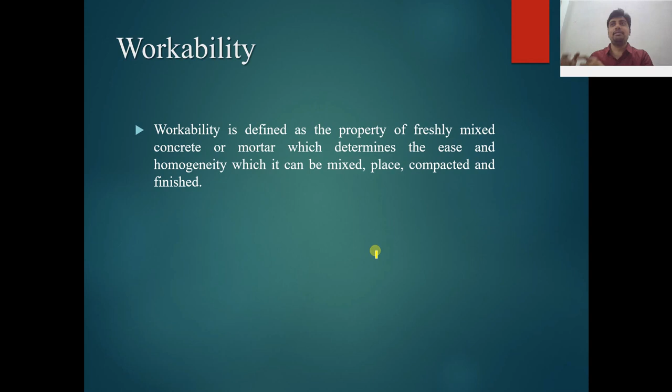What is workability? Workability is defined as the property of the freshly mixed concrete or mortar which determines the ease and the homogeneity with which it can be mixed, placed, compacted and finished.

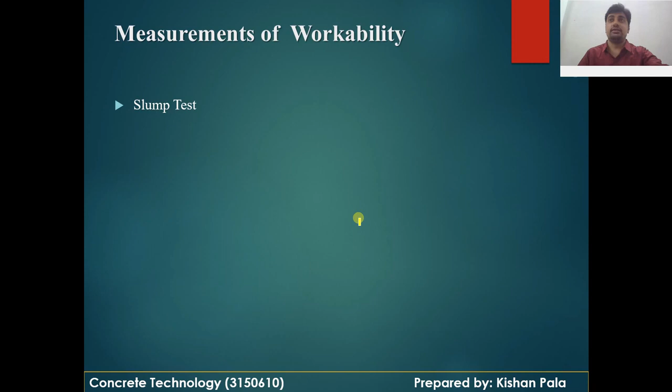Which are the methods for finding the workability of the concrete? There are many tests available. First is the slump test. Second is the compacting factor test. Third is the flow test. Fourth, VB consistometer test. And fifth is the Kelly ball test.

You can use these methods for finding the fresh property, the workability, of the concrete mass. In this lecture, we will discuss the slump test of concrete for finding the workability.

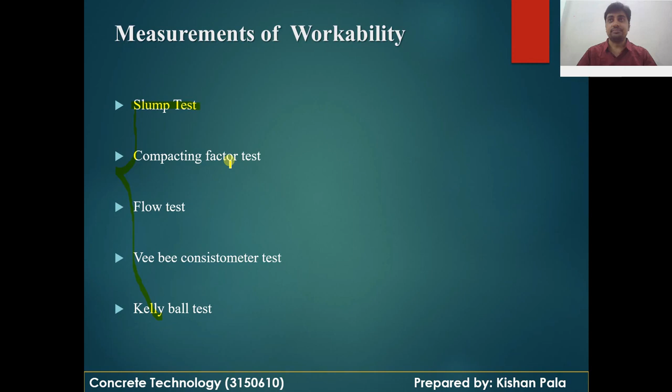Our objective is to determine the workability or consistency of a concrete mix of given proportion by the slump test.

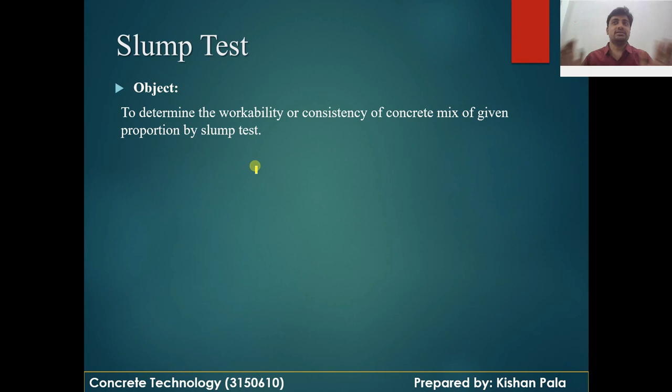Apparatus: as you can see in the photo, we are using the slump cone for finding the workability of the concrete mass, whose top diameter is 10 centimeter, bottom diameter is 20 centimeter, height is 30 centimeter, and the thickness of this mold should be at least 1.6 centimeter.

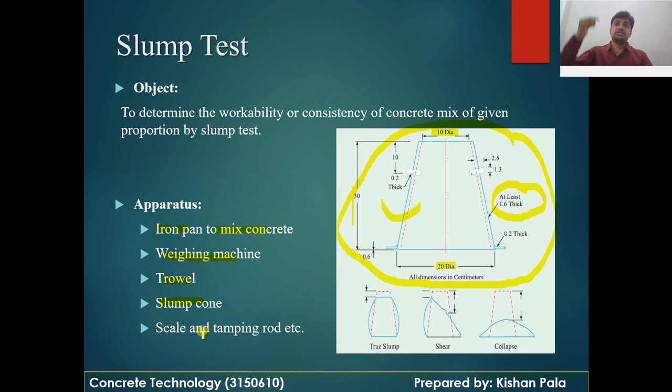Other apparatus used for finding the workability of the concrete include an iron pan to mix concrete, weighing machine, trowel, slump cone as shown in our figure, a scale for measuring the slump value, and a tamping rod for tamping, whose dimension is 16 mm diameter and 60 centimeter height.

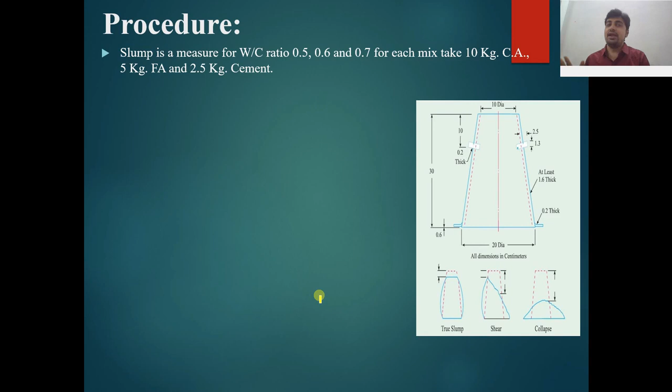Let us understand the detailed procedure of the slump test. Before starting, note one important point: slump is a measure for water cement ratio of 0.5, 0.6, 0.7. For each mix, take 10 kg coarse aggregate, 5 kg fine aggregate and 2.5 kg cement.

Let us start our procedure. Mix the dry constituents of the concrete thoroughly to get a uniform color, and then you have to add the water mass into that mix.

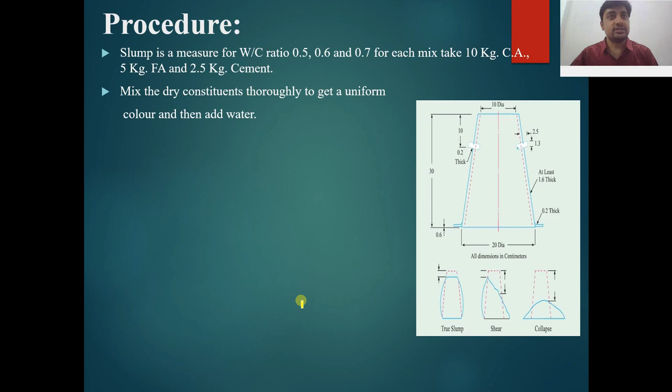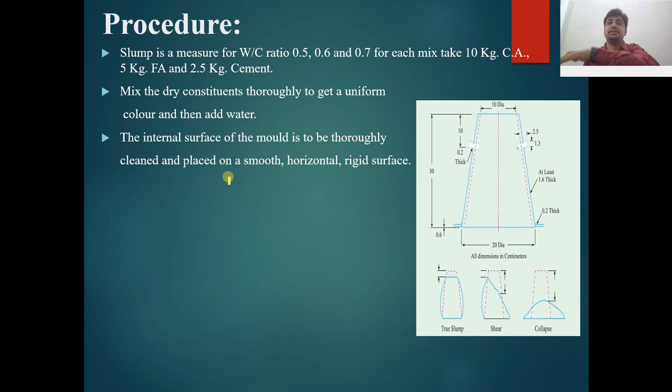Next, the internal surface of the mold is thoroughly cleaned in the proper way, and placed on a smooth, horizontal, rigid surface. You can use a plate also.

Place the mixed concrete in the cleaned slump cone in 4 equal layers. Remember, you have to divide your slump height into 4 parts, and you have to fill the concrete mass in 4 layers, and each layer should be tamped by the tamping rod with 25 strokes.

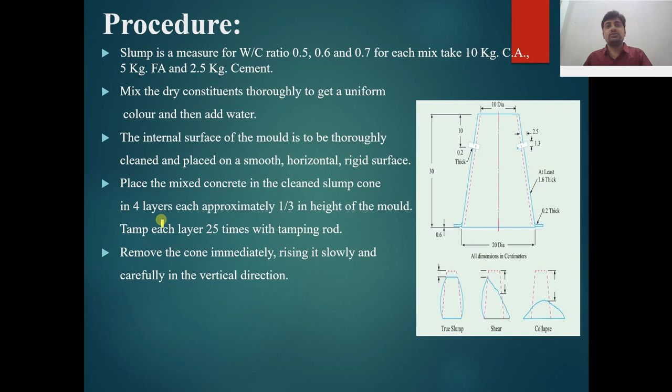Remove the cone immediately after filling the concrete mass into the mold, raising it slowly and carefully in the vertical direction.

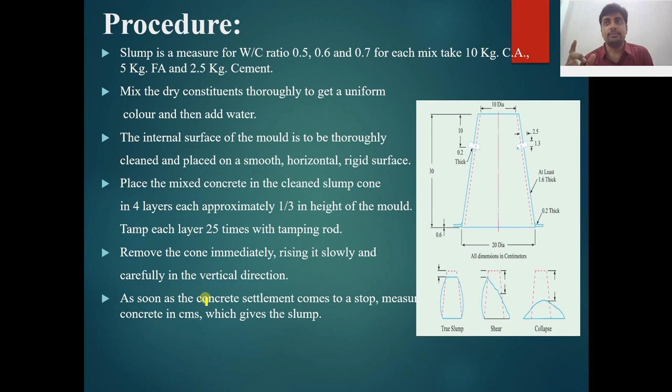As soon as the concrete settlement comes to a stop, measure the concrete in centimeters, which gives you the value of slump. This is the concrete slump test.

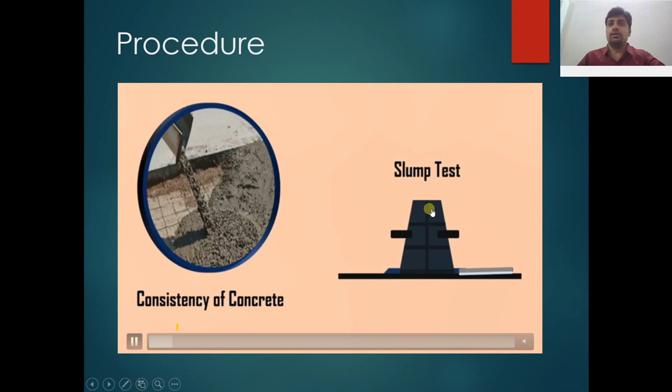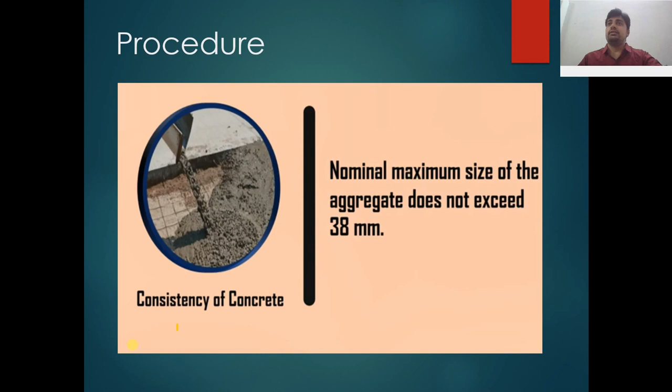As you know, this is the mold of the slump test we are using. Remember, you cannot use aggregate greater than 38 mm size in this test. We can use this test at the laboratory as well as at the site.

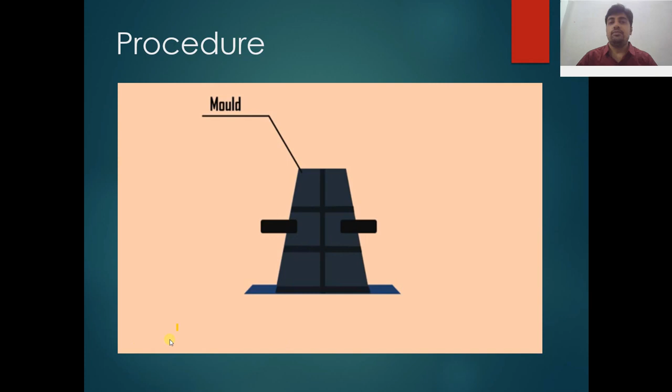You can clearly understand with this animation. This is the mold used in the slump test. I repeat again: 10 centimeter top diameter, 20 centimeter bottom diameter and 30 centimeter height of the mold we are using for finding the workability of the concrete.

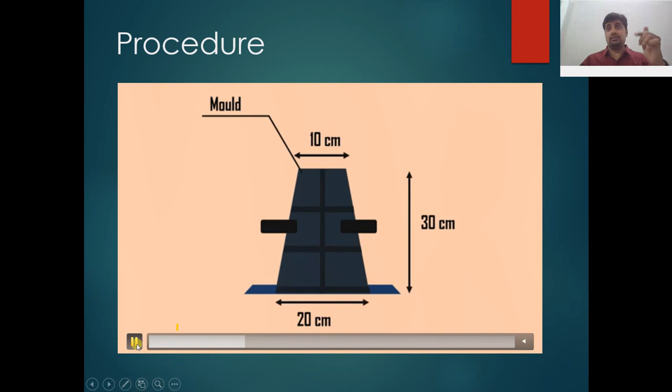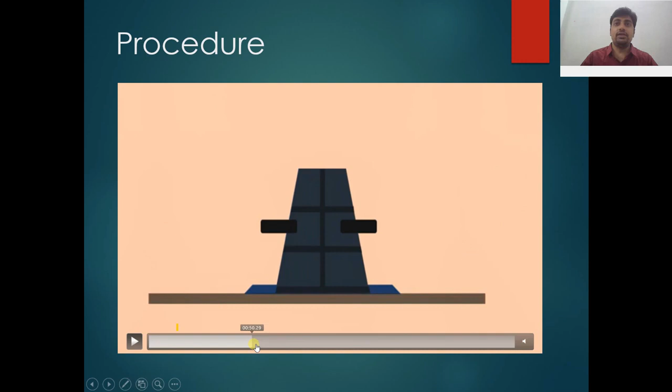Next, a metal plate you can use, but its thickness should not be less than 1.6 mm. And the tamping rod we are using has dimension 16 mm diameter and 60 centimeter length, or 0.6 meter length. This is the dimension for the tamping rod.

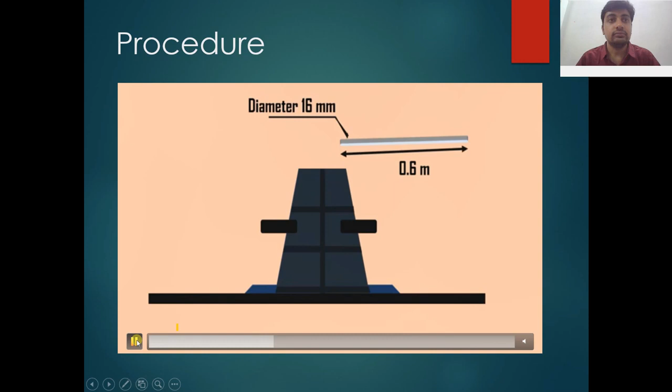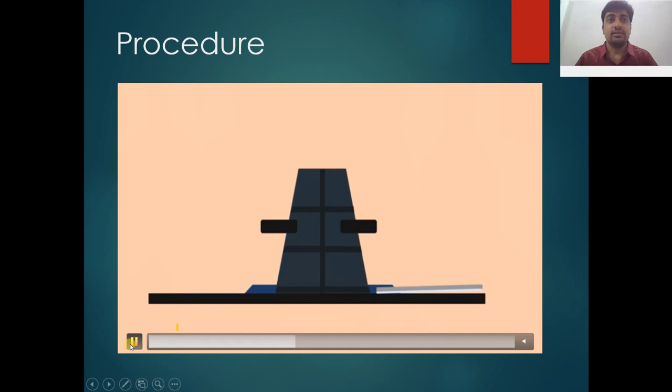Next, the procedure can be clearly understood with this animation video. We have to clean our mold and then fill the concrete mass in each layer, dividing the total height of the mold mass into 4 layers, each being 1/4 of the height.

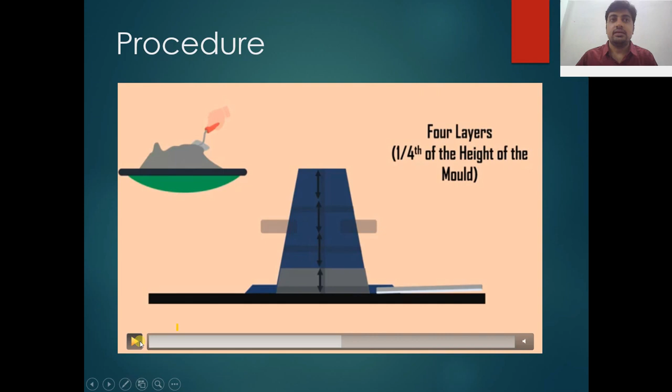You can clearly see the first layer, second layer, third layer and fourth layer. The animation shows the filled concrete mass in the first layer, and then you have to tamp it with 25 strokes.

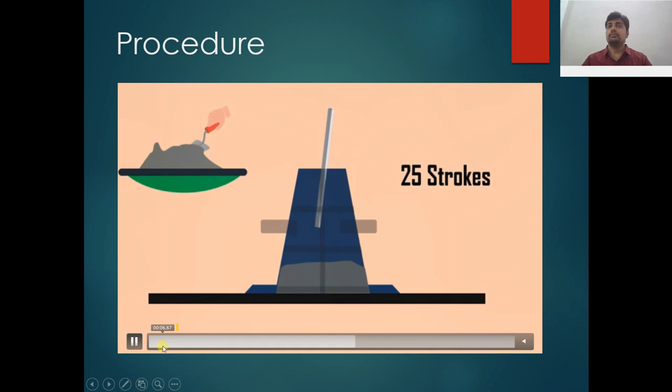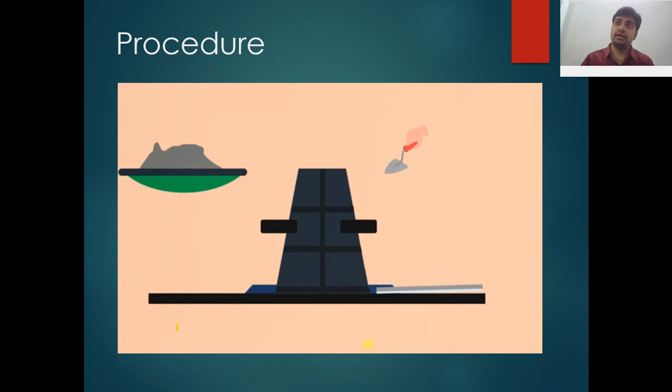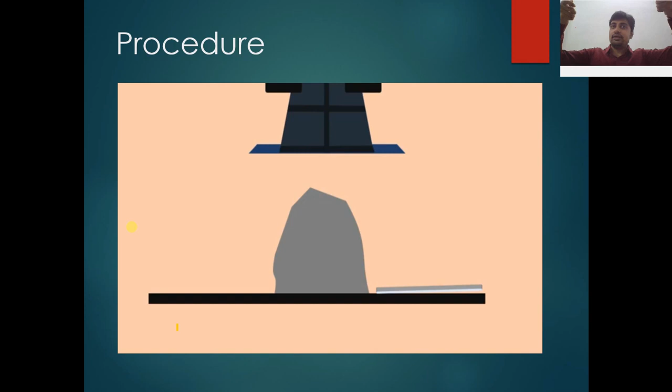Next, we have to fill the whole mold with the concrete mass layer by layer. After filling the mold, we have to raise the mold, and you can see in the animation video how we get the slump value.

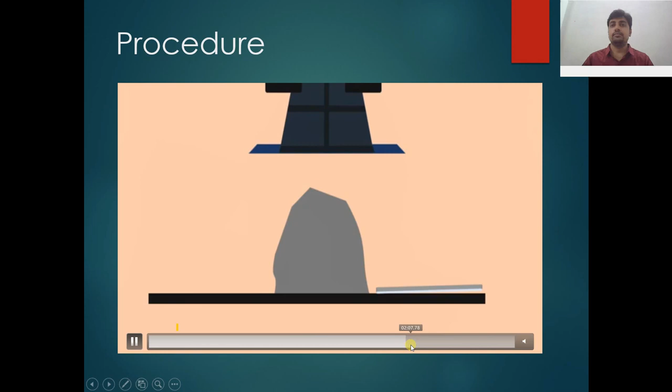You can get the slump value from this point to this point. This is the total height of the mold, and this concrete mass, the upper height point - you have to measure the distance from this point to this point, and you can get the slump value of the concrete.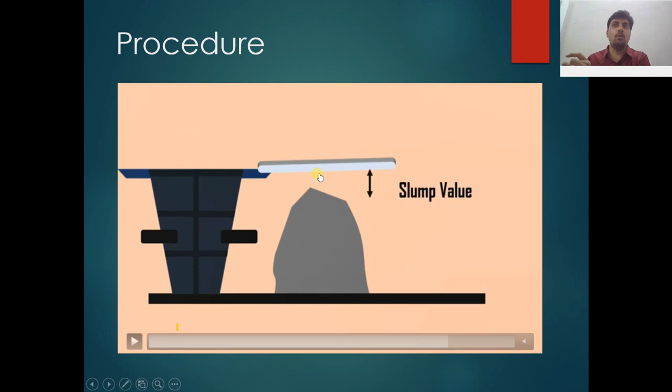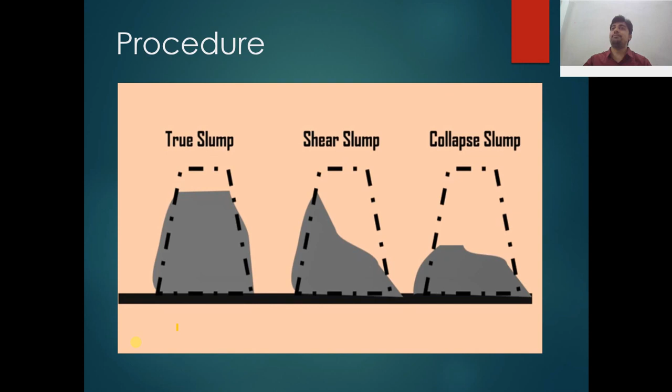Slump can be classified in three ways. The first one is true slump, the second one is shear slump, and the third one is collapse slump. It depends on the type of mix.

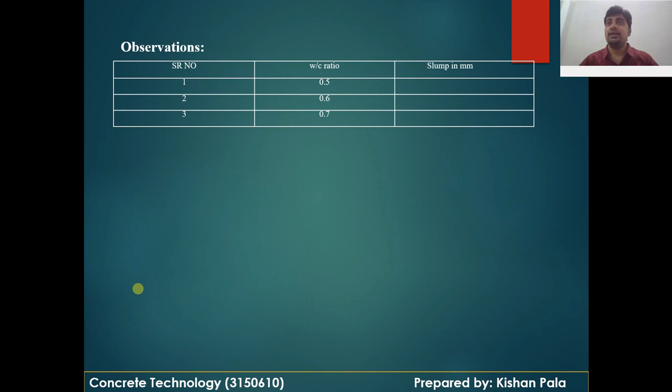So hope you can get the procedure for finding the workability of the concrete mass. You have to take different water cement ratios for different mixes - 0.5, 0.6, 0.7 - and you will get the slump in mm. And you have to take some precautions for testing this.

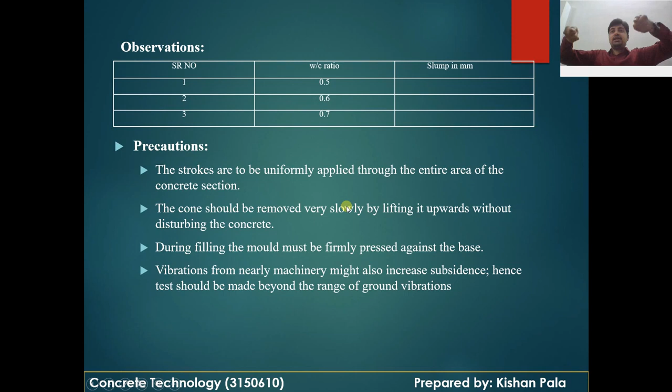The strokes are to be uniformly applied throughout the entire area of the concrete section. Remember, this is one of the important points for compaction, and the cone should be removed very slowly by lifting upward without disturbing the concrete mass.

Third point: during filling, the mold must be firmly pressed against the base, and vibrations from nearby machines might also increase the subsidence. Hence, the test should be made beyond the range of ground vibration, so there may be minimum disturbance to our test.

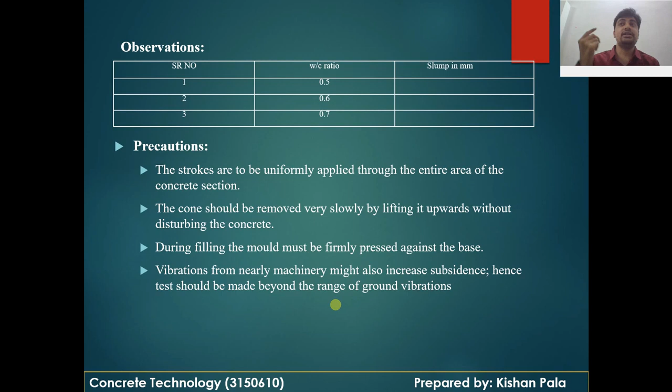So you can classify the concrete mix in different degrees of workability using the slump value, and then you can decide whether this concrete mass can be used at the designated area or not.

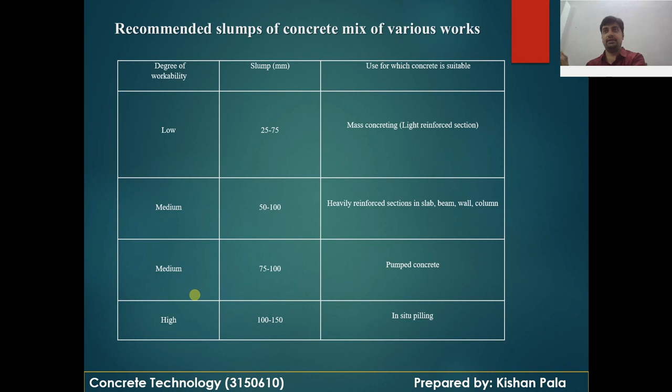Which are the limitations of the slump test? It is not suitable for concrete in which the maximum size of aggregate is more than 38 mm. If you are doing mass concreting and using larger size aggregate, more than 38 mm in size,

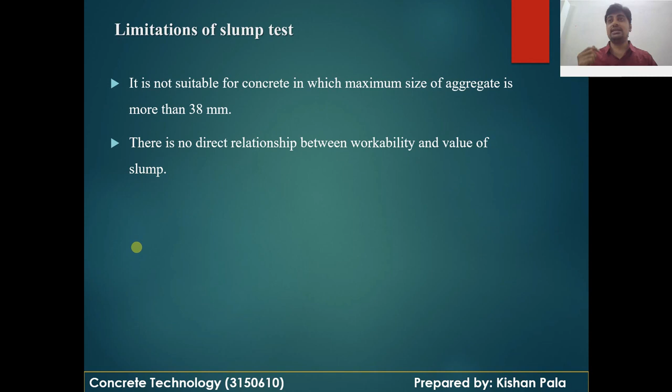in that case this test is not possible to perform. There is no direct relationship between workability and the value of slump, and slump does not occur in a dry mix. Many shapes of slump can occur, and it is difficult to decide which is the correct value for different types of concrete mix.

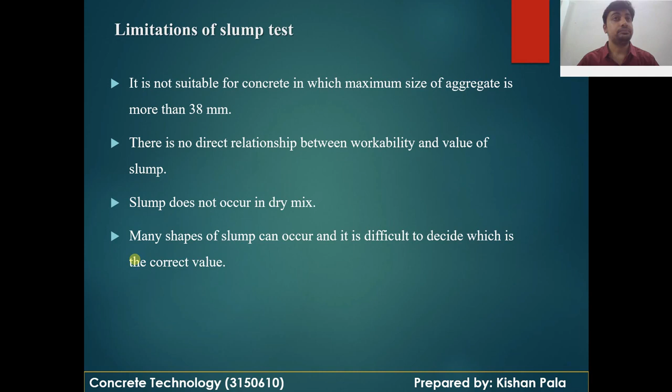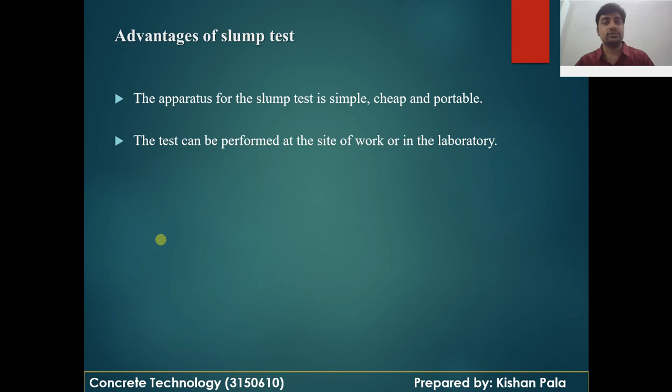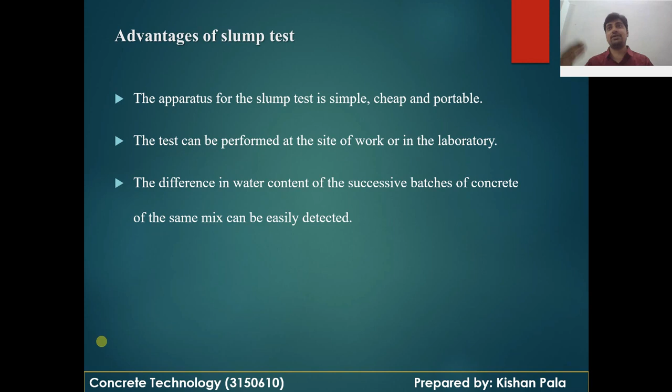If we talk about the advantages of the slump test, the apparatus for the slump test is simple, very simple, cheap and portable. The test can be performed at the site of work or in the laboratory also. The difference in water content of successive batches of concrete of the same mix can be easily detected, like different water cement ratios 0.5, 0.6, 0.7, and you can classify them accordingly. Thank you very much.